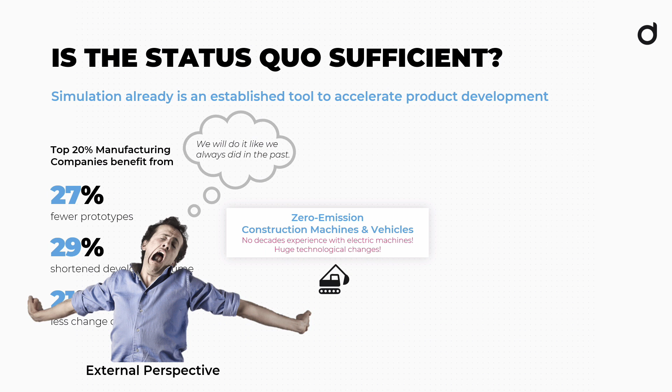I mean, I see where people are like, hey, that's okay, right? Why should I now use more simulation? We use some, and we do the rest with experience, like we always did. I think we overlook something here, because just one slide before, I said this is a very unique time, right? We have so little time, we have such large technological steps in terms of electrifying those machines. There are no decades of experience.

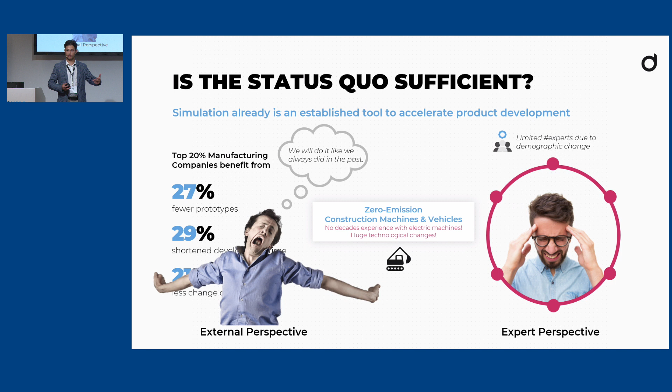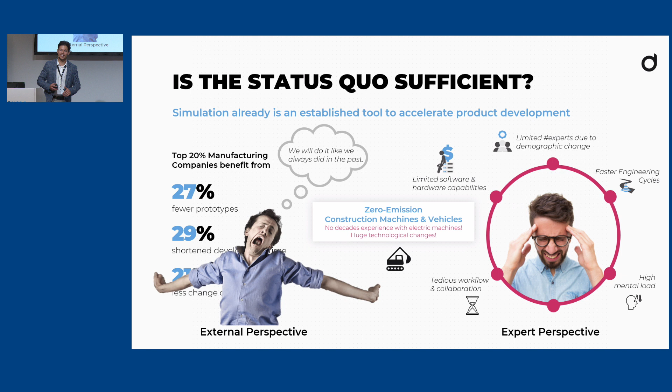And if you talk more with the experts and the engineers, I would say they look more like this. Part of their headache is there are less and less of us, right? We have something like demographic change. We have the same old school tools, software and hardware, but we need to be faster than ever before. And the workflows, I would say, they're also rather boring, rather slow, and all this contributes to their stress.

So my question of today, and the reason why we chose this topic, should we now continue doing it that way? Do you think we're able to reach our goals to build zero-emission machines very, very fast? I want to show you a little bit what could happen, right, if you continue the old way, and this is why I chose an example.

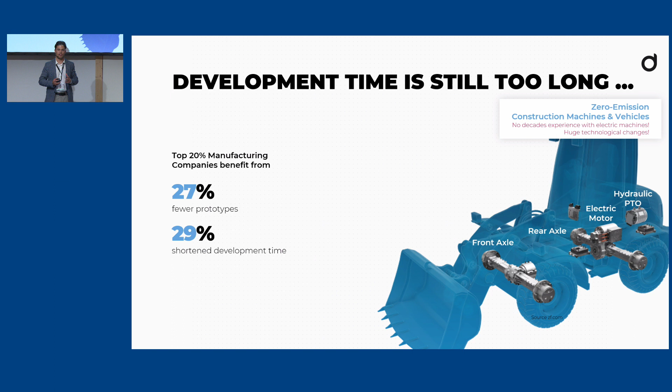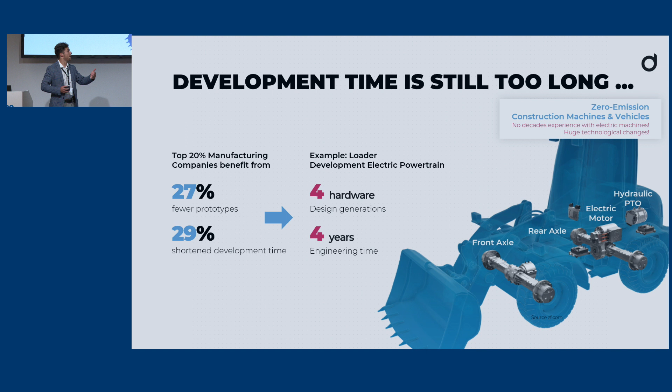So let's take this very nice case here, like a huge loader. But it could also be your own mixing machine or anything else you build, kind of a mechanical product. You have the axles, you have an electric engine, you completely redesign it now to get it efficient. And if you look at the statistics, what typically happens, as an example, is you need like an A prototype, a B prototype, you have a pre-series, you have a series, and roughly 4 years, 4 huge hardware generations to get there. And that's already, although they use some sort of simulation.

In my opinion, this is too long, right? Too long, because if you would start today, next bauma in 3 years, you would still have the old products to show and not the new one already. So that's what I want to change. But why do we have

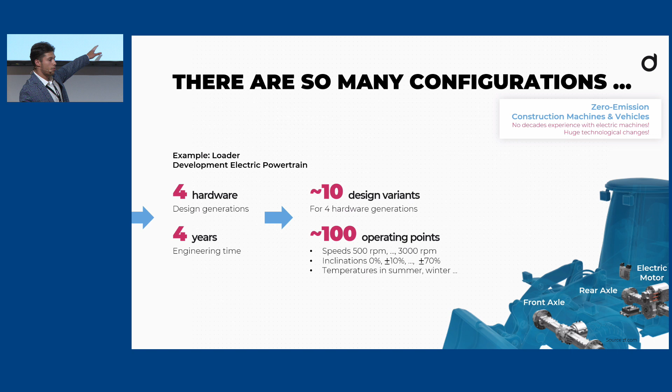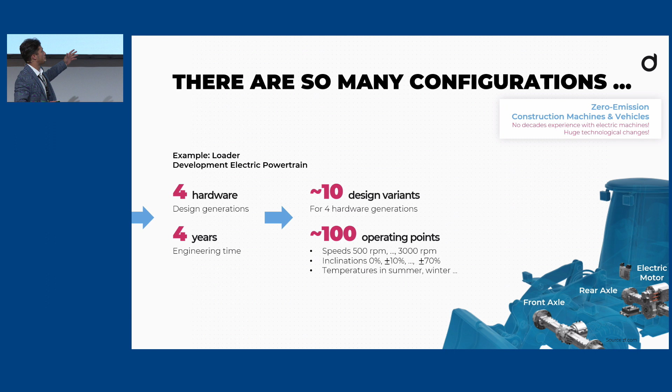this amount of time. The reason is if you look more to what you want to simulate, so what are engineers facing? You have too much, too much varying conditions. You have varying designs, and if you talk about construction machinery, they need to work if they drive up, if they drive down, in the desert, in Siberia. So all this ends up to these huge numbers to actually test virtually as well.

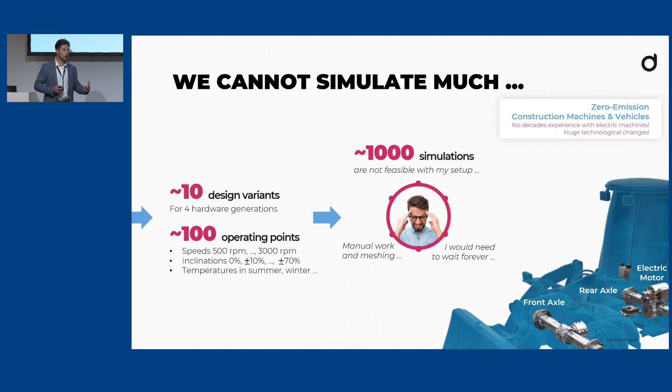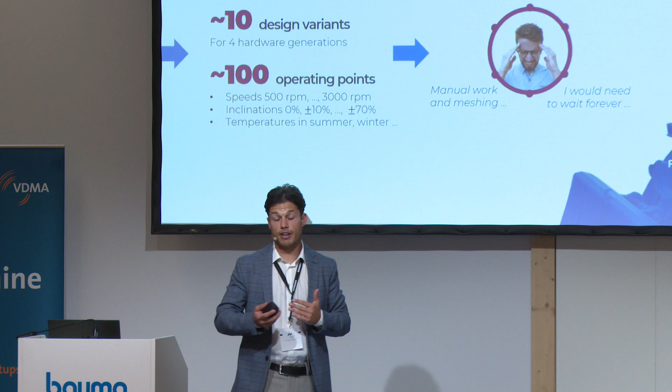And as I said, our experts, they look like this. They're not able, that's not feasible for them to go this far. They have manual workflows. They would need to wait forever for the results. And what happens is that they just select something, maybe 1 or 2 design changes, maybe 1 or 2 RPMs or speeds, and that's it. The rest, we need to do the old way, like test it, build prototypes to make it sure. And this ends up to the 4 years I was just telling you.

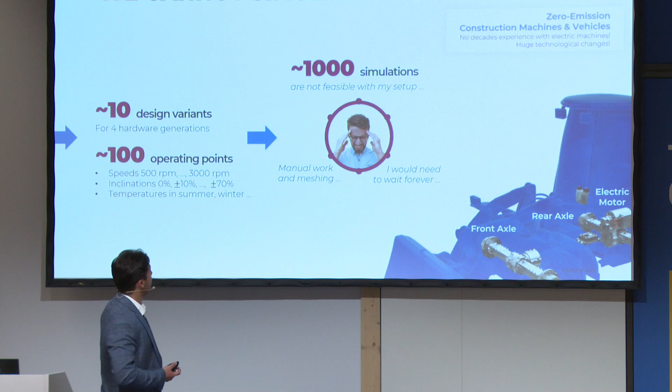The engineer, he could try to change something, right? But engineers would now need to run to your IT department. And I don't want to complain about IT, but they're also getting less and less. It gets outsourced. Maybe you know how it is in large corporations.

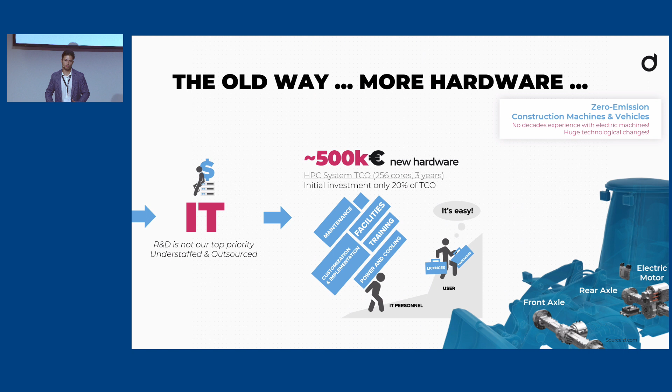If they would give this engineer more power, you need more computing power to accelerate our product development, you would end up buying hardware, maybe, but the problem is the hardware cost is just a tiny part. What makes up this huge number is what we call, or what you may know, the total cost of ownership.

So the IT staff is carrying this huge backpack, maintaining it, implementing it, customizing it, and this is actually the majority of the costs if you look over 3 years. And the IT, they're also improving, right?

So engineers, they hear about cloud. Hey, can we also try out cloud in engineering? And an option to make it, I would say not really better, but to try it out, is you go out and rent your own cloud hardware. That's also what some companies consider.

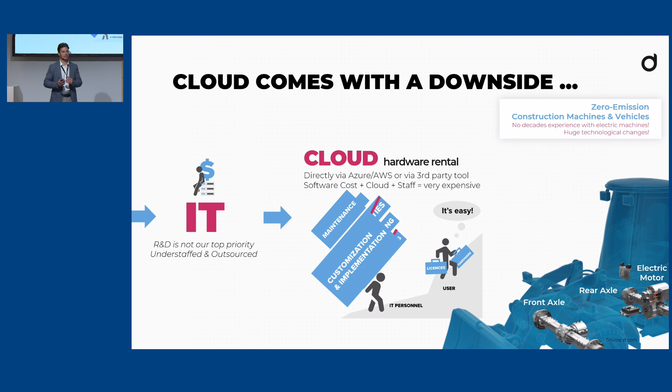There's a downside because some cost buckets, like hardware and electricity, you cut down. But one underestimates that you need to get an expert to set up this cloud infrastructure for your engineers. There are actually much more updates, because every time you have new hardware, you can give it to the engineer. So some parts the IT needs to do, they even get more effort.

And if you ask the experts, are you happy? Are you happy now with what you got? You have a little bit more hardware, we use cloud. They tell me something like, hey, I still prefer to work on my own, on my installed software locally - the usability, I have long data transfers - and I think that's already the end of this, my first story.

So we started with 4 years of engineering, not being able to simulate enough. There are ways to change it by buying more hardware or by your IT renting hardware in the cloud. And none of them was really like a good way to move on. And luckily, I wouldn't be here if I would now end the presentation.

We have a way to make it better, and it's if you use cloud-native software architecture. It sounds fancy, but it's not brand new. If you look at what other departments are doing, for example sales and marketing, they are already switched to cloud-native tools - web-based, browser-based tools built directly in and for the cloud.

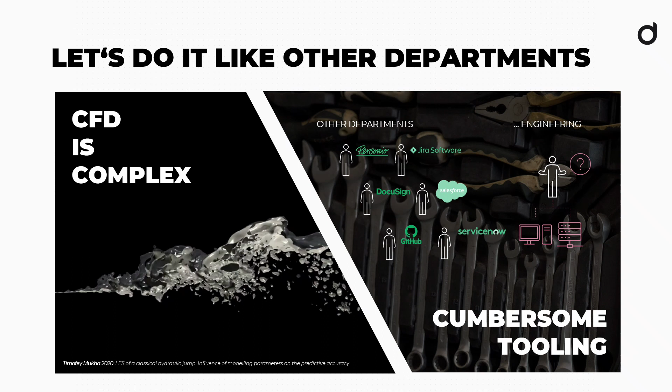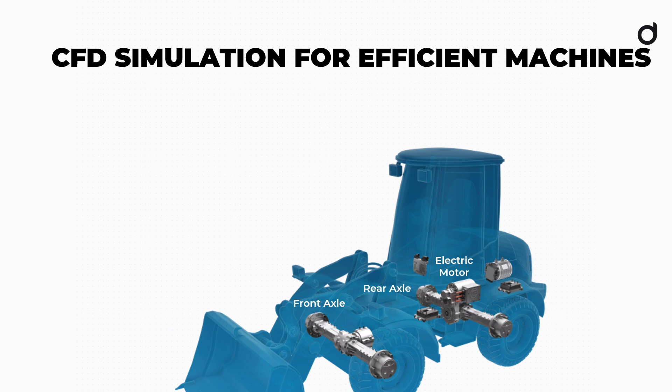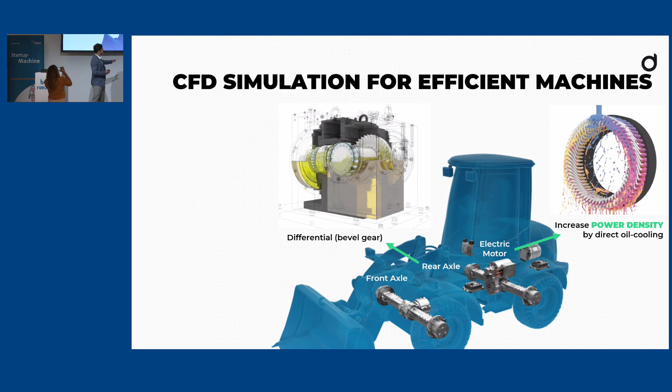And we in engineering, we solve some of the most complex things, like complex fluid simulation, and still do it the old way. To give you an idea what these complex simulations are for, in this example we showed before electrified loaders - you would simulate how the cooling is in the electric engine, you want to increase the power density, get new concepts, but you also have those axles, like the differential, or the planetary gear stage.

And the engineers here, they want to find out what amount of oil do I really need? Can I use less oil, less losses, less heat? This is what they already try and find out with their software today. But as I said, they have to select carefully what to simulate.

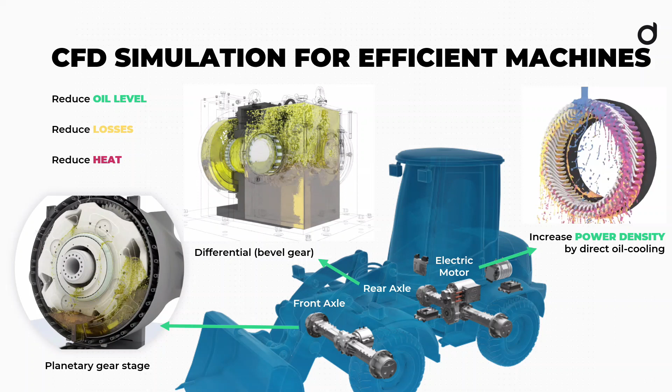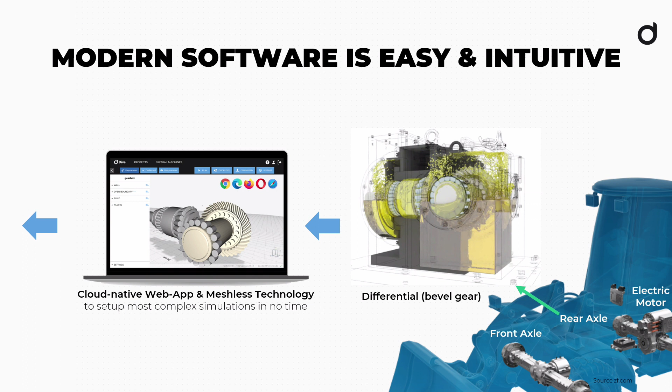If you move now cloud native, it means you set this up directly in the web app, in the browser, and it saves you a lot of time. It's much easier, much faster. And in this particular example, you also use a mesh-less, so a particle-based technology.

And what we hear from our users, my favorite quote was what I got. He said something like, I didn't simulate it now for 4 or 5 months, but I still knew what to do, which buttons to click. Like, I didn't forget, I didn't need to relearn the whole software.

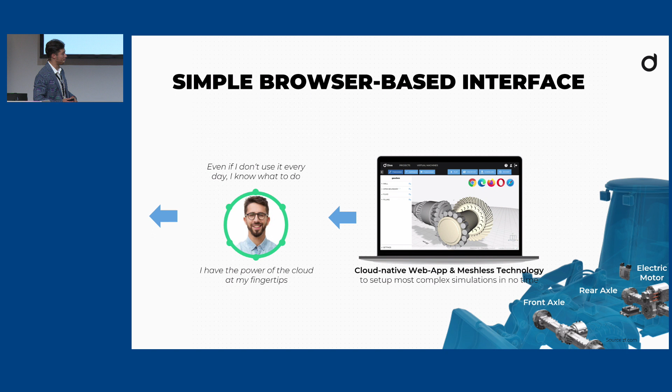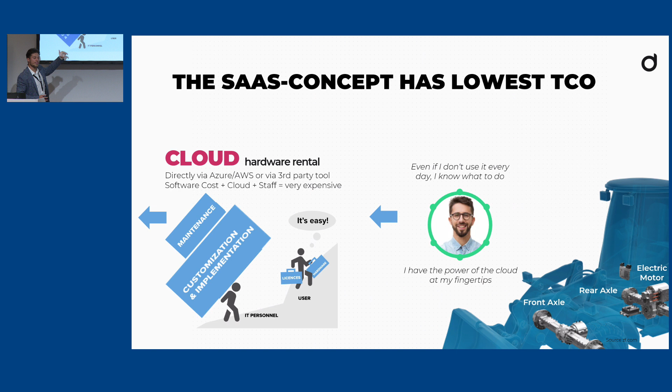And I have the cloud now, I have the full power of cloud. I said before, cloud is bad because your IT has to worry about so much. But cloud-native software means that the software providers, we take care of all the administration, of all the implementation. And there's basically nothing much to do for the IT anymore.

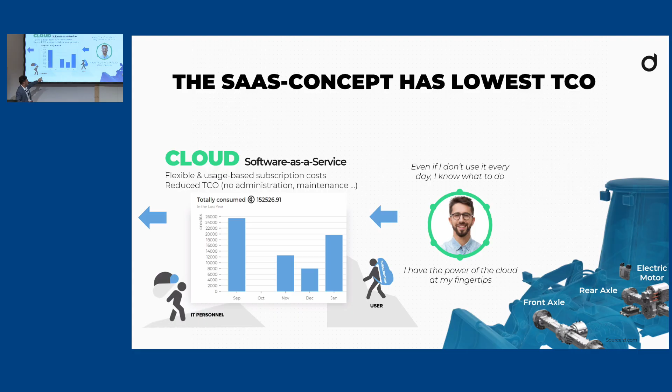On the other hand, your user just uses a subscription. So if you've heard of it, this is called a software as a service model. He just has his access, like you have a Spotify or Netflix subscription, and he's more or less independent. The IT doesn't really need to get more power, more cores - everything is on his desk. He can climb this mountain on his own.

If we go back now to this simulation scenario, right? Wow, such huge numbers - they're not so scaring anymore. Actually, they become feasible. But the magic doesn't happen in the app directly.

It happens in the back end. So my favorite quote from our CTO to describe what cloud-native engineering software is: he says it breathes, like the backend breathes. If you have more demand, it grows, it gets bigger. And as you have less demand, it just shrinks again. So you have an automatic scaling.

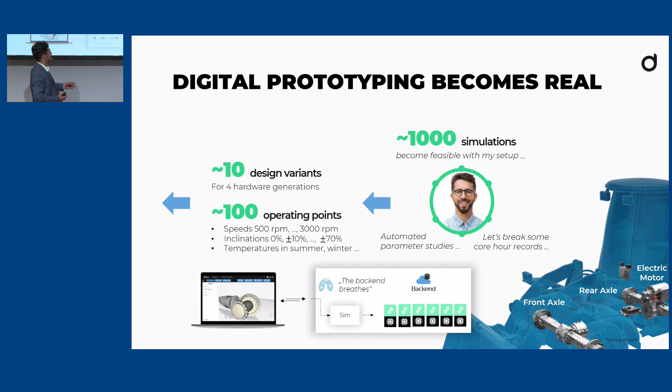And this you cannot build, or your IT cannot build on its own. Otherwise, we wouldn't have our jobs. So this is something, of course, we are experts in doing.

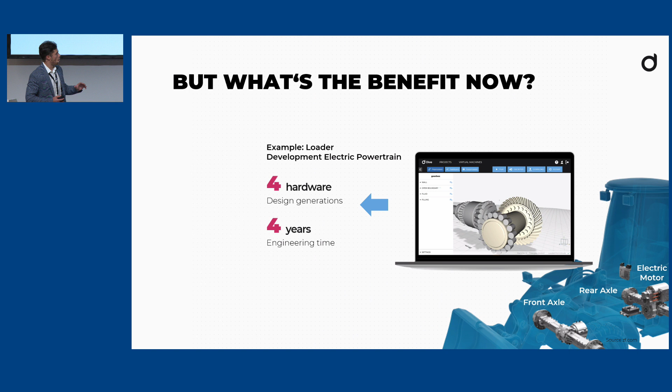And the end of my presentation is now going back to this initial slide with initially 4 years, 4 large iterations. What our customers are already doing with our app, the first version, like the first prototype, is just a virtual iteration. And I'm pretty confident that you can save 1 year and be ready to show us your new product at the next bauma 2025.